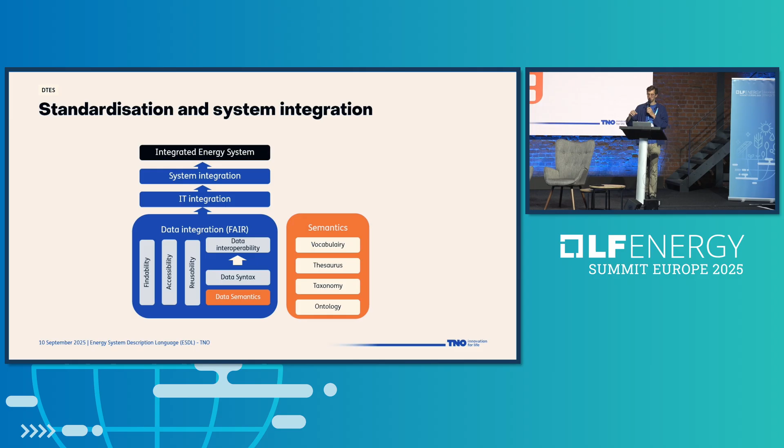So why did we start this? You say there's already twice CIM on the last slide. Why would you need ESDL? So we noticed that the interoperability between all these different models was very poor. And these models are not only modeling electricity systems, but also heat networks, gas networks, etc. The transparency on what kind of assumptions are below these models, what kind of data is used, and what kind of calculations are being done on them is very poor.

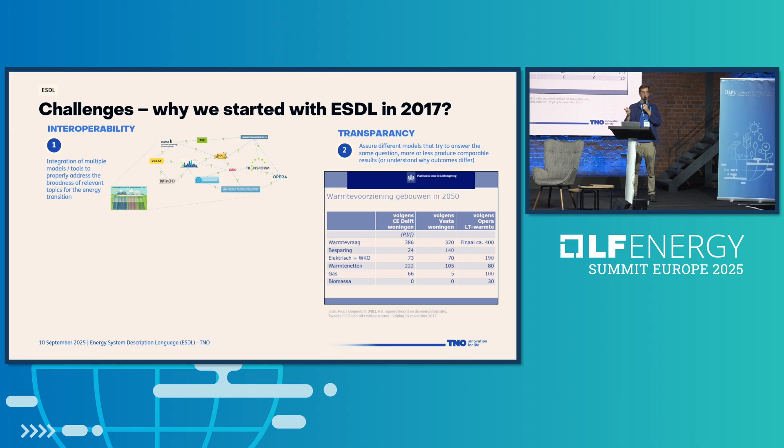So there was a study on 2050. Well, basically, the take-home message is three respected institutes were asked, like, how does the future look? And all three of them said something completely different, which is obviously fine. But at least it would be nice to track the assumptions they all made to see, like, hey, where did their visions diverge?

And then there's the challenge of aggregatability, which is already in a small country like the Netherlands, with the different DSOs, the different provinces, that they all do their study. And, you know, in the end, you want to have sort of one national plan and aggregate all these different studies, which is impossible. So what you'd need is an ontology, a data model that they would all use, with their own different type of models on top of them, to solve these three challenges.

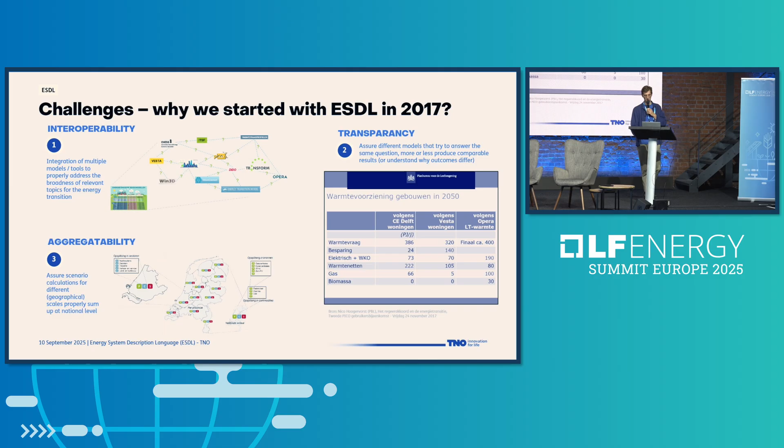So that's what TNO started off developing, and it started small, became a bit bigger. There are different levels of abstraction in this data model, from the level of an energy system down into energy assets. And it doesn't go as detailed as CIM does, but it does go down to the asset level. And it's quite vast. This is what it looks like currently.

And the things that are captured in this beautiful chaotic model are basically system components and topology for gas, electricity, and heat, and spatial information. You can add profiles to the different nodes, to different ports, obviously. And there is all different technology information, which more relates to the data source part. And then there's all these other things that you can add to it. But in the end, still, it was a very large hierarchical model that was built.

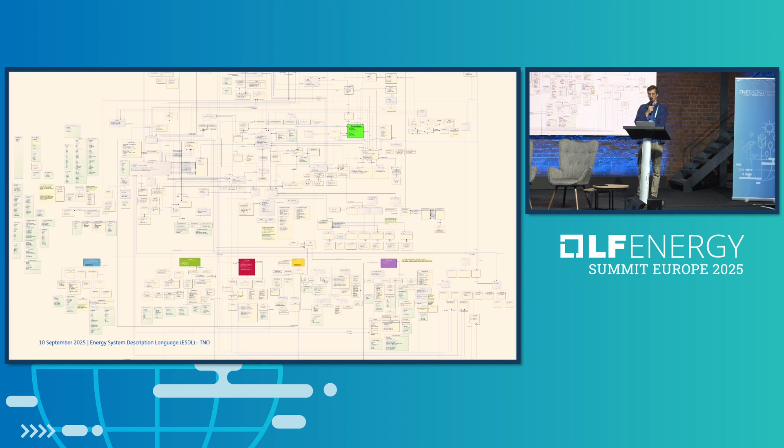And so, okay, you have your ESDL, you need your user interface. So it was only when a user interface was built, where you can draw your system on a map and an ESDL is directly created, that it started to get traction.

Other people in TNO started to actually use it. Say like, hey, this is quite easy to use. You could select your different assets you'd have. You could add your profiles. You could tap into profiles that were used in other projects. And it started to be very practical.

So, okay, we had the user interface. And over the years, this actually sort of exploded in our face. No, not really. I mean, there were all these different models and different research groups that started to build things on top of the map editor and integrate different models from, well, MESIDO for networks on the North Sea, to energy system simulators, to market models, to wind models, to district heating, network optimizations.

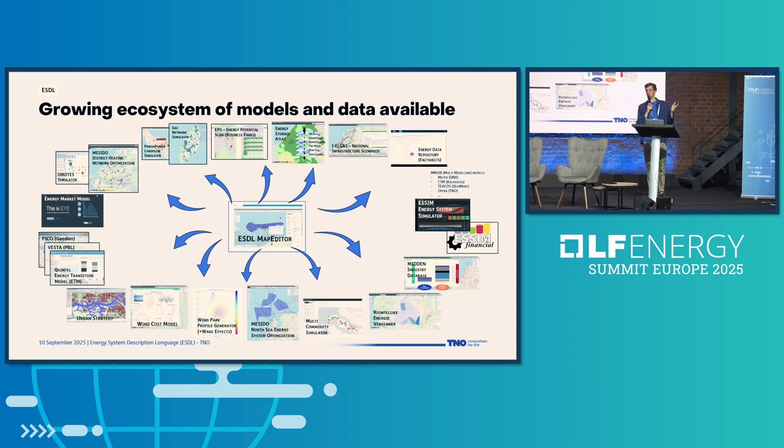So there were different parts, different labs at TNO that said, hey, this is actually very useful. I can draw now my energy system in a way, and I can communicate this to the people that work on the simulation models. So there were different application domains that started to use these different tools.

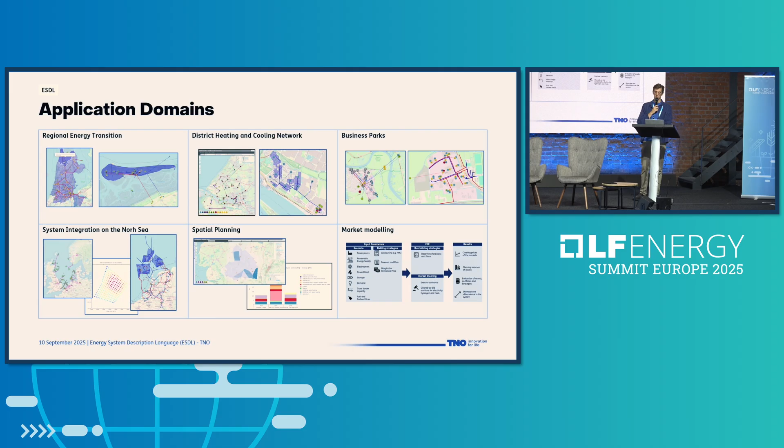And at the same time, we also started to create a data repository, like the energy data repository, where we store different profiles to use, standard profiles, both in consumption and production, which makes it really easy to start filling your ESDL model.

There's the Midden database that was created with all different types of industrial processes captured and translated into ESDL asset pictures and related information, so that you can easily tap into different industrial processes if you want to take them into account. So, okay, this is your data resources part.

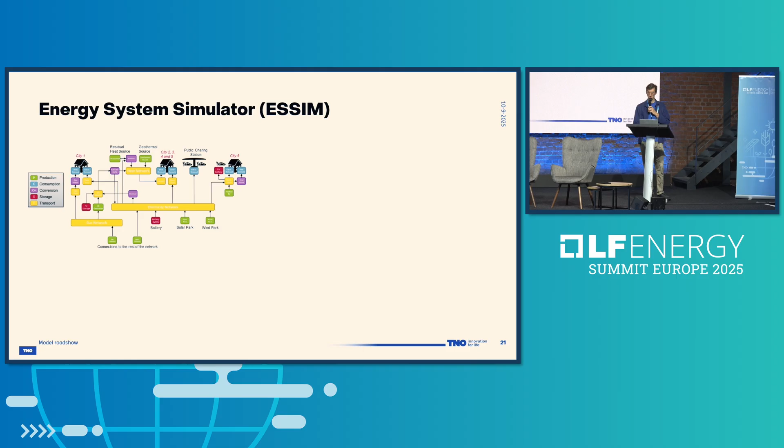Then there are different simulators actually used and developed by TNO. One of them is ESSIM. I won't go into it in a lot of detail, but it is interesting because this was something that was fully configurable in ESDL and was able to create different scenario simulations and answer questions that were quite relevant.

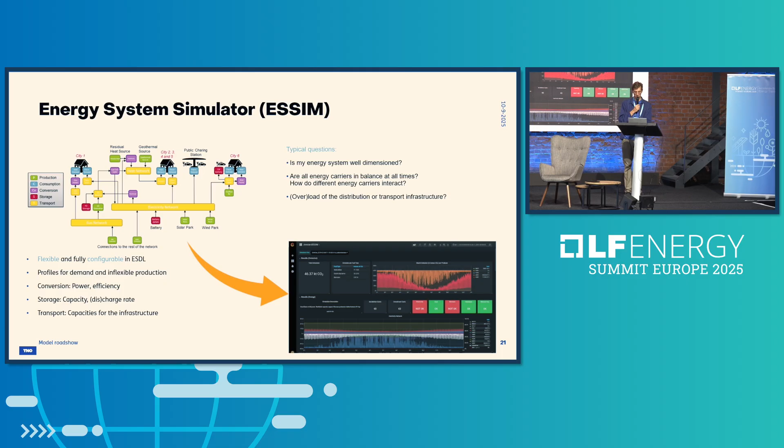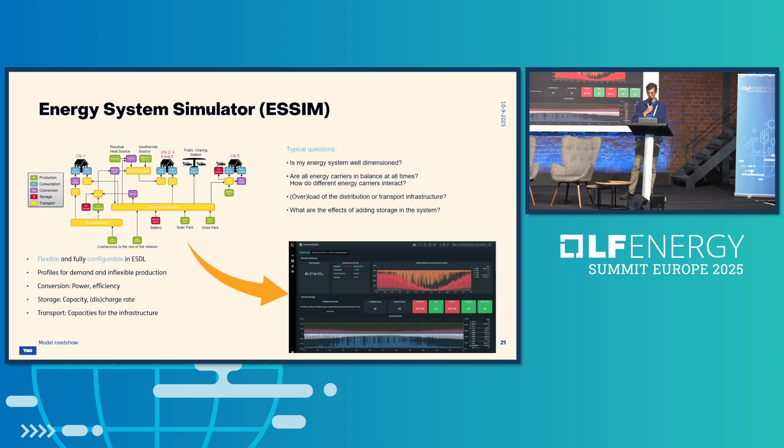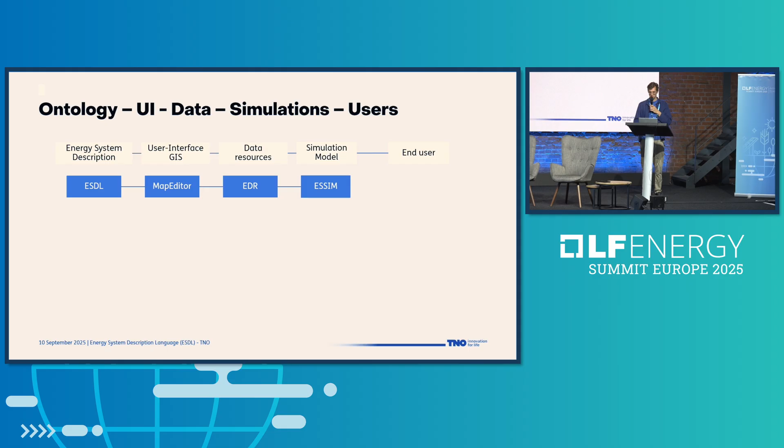So is it well dimensioned? Is everything in balance? Is there a particular area in the grid that will be a problem in future? What are the effects of adding this or that asset, etc.? So, okay, this is the energy system simulator that was used. Then you do need also an end user in the market to actually use this entire chain in order for it to become valuable.

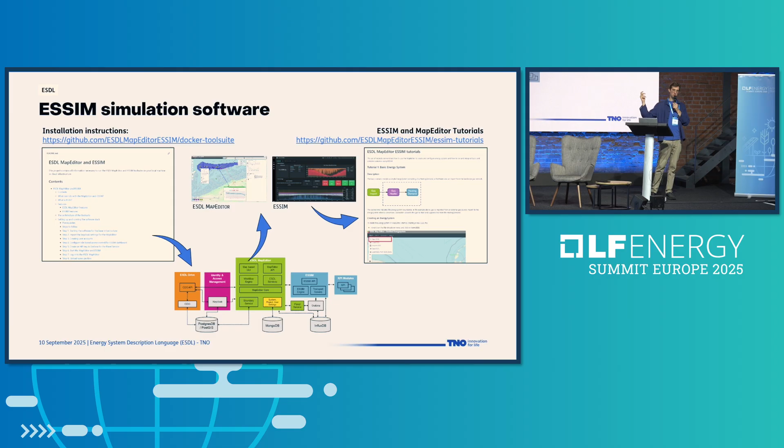So both ESDL and ESSIM are open source. There are quite a lot of tutorials out there. And the tutorials, they walk you through how it works, what's behind the curtains, something that I currently will not do.

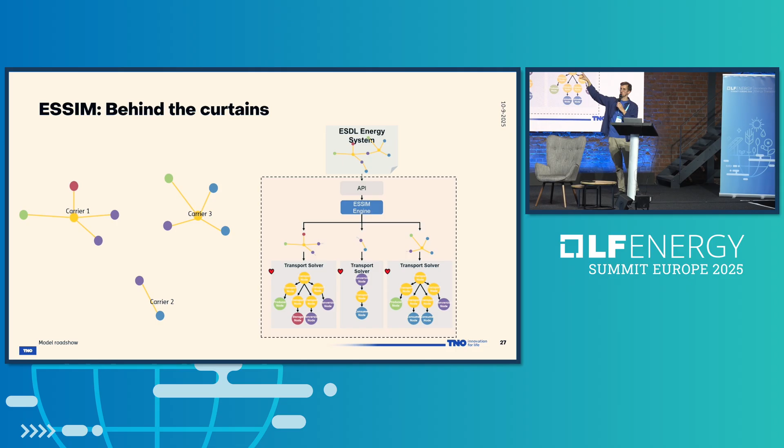What I will show is that some of the things that are happening at TNO is that once you do have your energy system and your ESSIM engine, you can then basically use different transport solvers for different types of carriers, whether it's a heat or an electricity or a gas network. And you can also easily replace your solvers with something else.

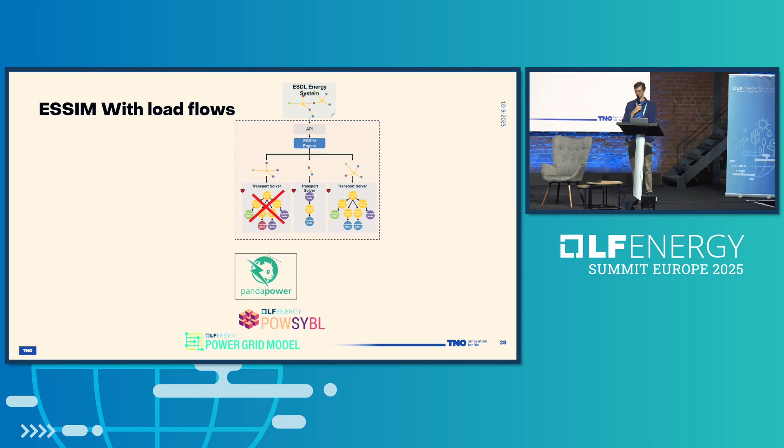Obviously, it can be Panda Power. We are currently working on PowSyBl. And after the last presentation, obviously, I cannot but only say that I hope that we will also integrate it with the power grid model.

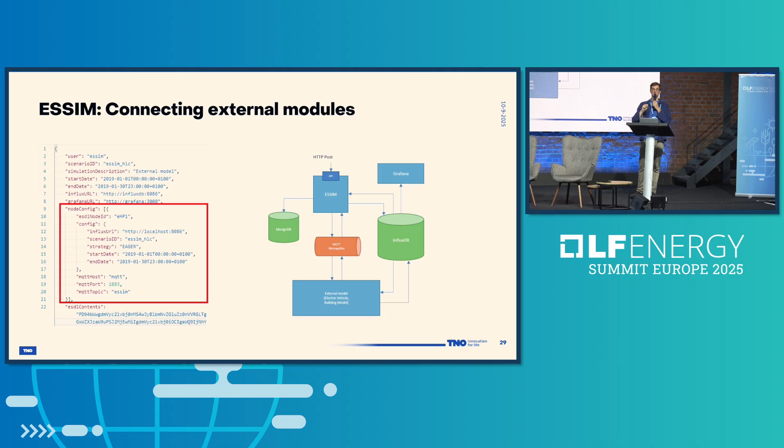Unfortunately, they don't all yet use it, but there are about 50, 60 in the Netherlands that have downloaded this software and started to use this in their daily work, which made us obviously very enthusiastic because we can then add the last important node to our chain.

So to come back to what I said earlier, the applied research organizations of this world that get state money, as TNO does, Fraunhofer also, I imagine. I think you could create something for industry, you could see if other industrial partners want it, and then it's time to find independent implementation partners to actually have it scale.

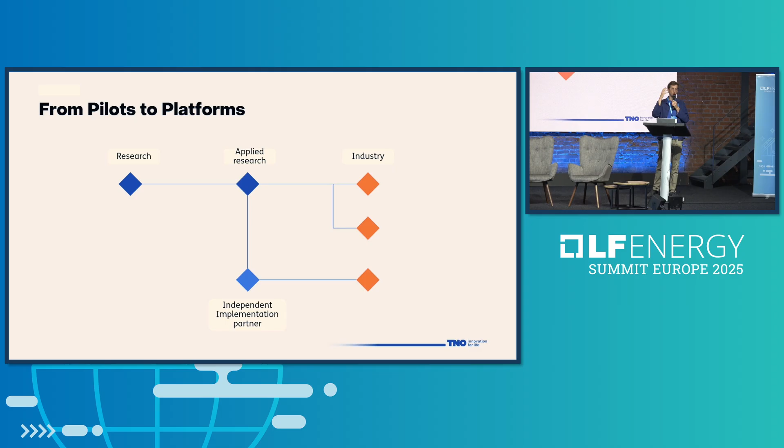There are, at the moment, sort of discussions with these implementation partners, and this is the search, sort of how to, what we now have. We have an end user that happily uses it, wants to pay for it, but I'm not sure how much, and then what for, and then would you start first to build a community and ask for a contribution fee? So these are questions that run through my mind. So if you say, hey, I have some of the answers in my mind, it would be nice if you share them with me afterwards.

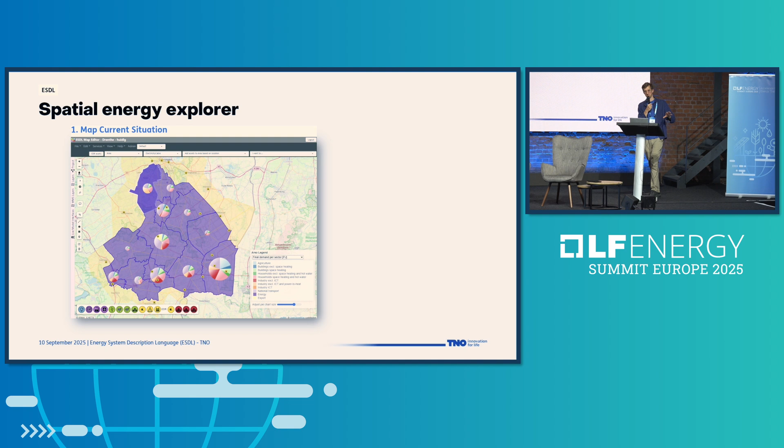There's a couple of other tools that I can show you, because you saw the exploded view of that interface and all the different models that were then able to be executed from this interface. One of them is the spatial energy explorer, which is one of the latest. But I think I won't do that. I will run through the slides, because I guess you get the message that all these different types of simulations suddenly become possible once you've created a common ontology to describe your energy system with.

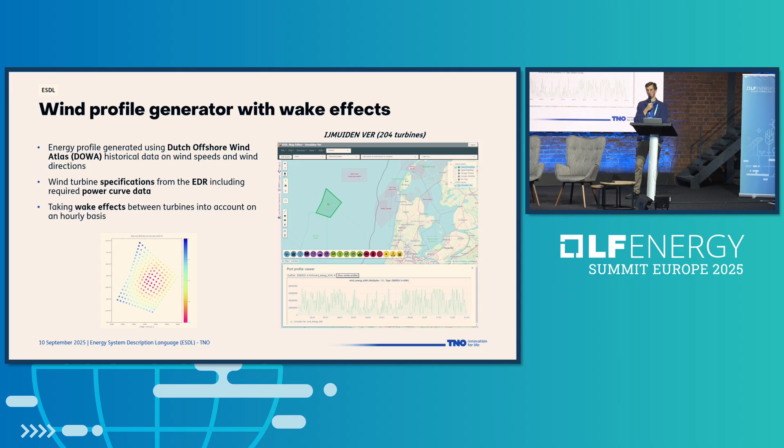An important development that we see, though, is that at the moment we built this user interface, the map editor, ourselves, which makes it easy because then you can integrate all these different tools and use it internally in projects to advise others. There was the people group in one of the companies, which is a commercial company with a lot of experience in geospatial platform building. But there's also ESRI that we currently have a conversation with to see whether they can include ESDL in ArcGIS, which would obviously be amazing.

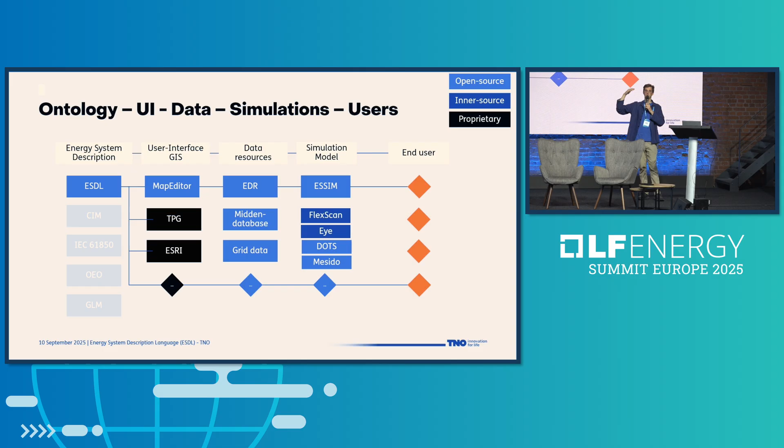It's also an important discussion that I already started today with some of you: you have all these different standards. Is ESDL the best one? I kind of don't care. I think what would be nice is if we converge towards something that works for everyone, and if that's with interfaces or adapters, fine. But I think it would be great to develop them in an open source manner so that we can quickly see whether it made sense. Once you have commercial platforms like ESRI join the journey, that'd be extremely exciting for us, because then all the different models are accessible for millions of people.

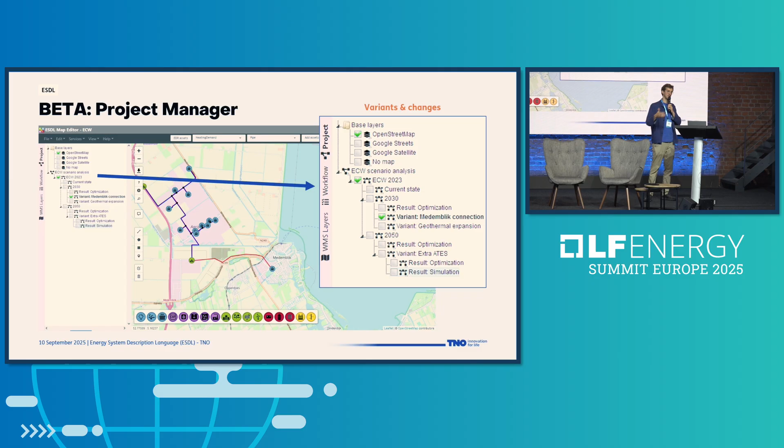We've documented it fairly well, maybe a bit too well, because TNO as an organization does projects, and the risk is that it sometimes becomes a bit patchwork-like. Maybe sounds familiar. Then there are project managers to help solve the complexity that you've just created. But in the end, to come back to the question asked at the start of the day, less talk, more code, or more yoga. Maybe, but I also see that at the moment there's a need to form a community and structure this code and these data models, and structure the strategy that all these initiatives take in order to align the data, the models, and the ontology that they use.

So what I'm thinking of is having an ESDL open source core as an open standard, which would be a bit better than CIM, because you could obviously develop it quicker, and then have a strategy where you develop your tools first internally with companies and then bring them to the outside world. Next steps, I think I've mentioned them all during this presentation. I hope that we can jump on this train, moving towards graduation at some point.

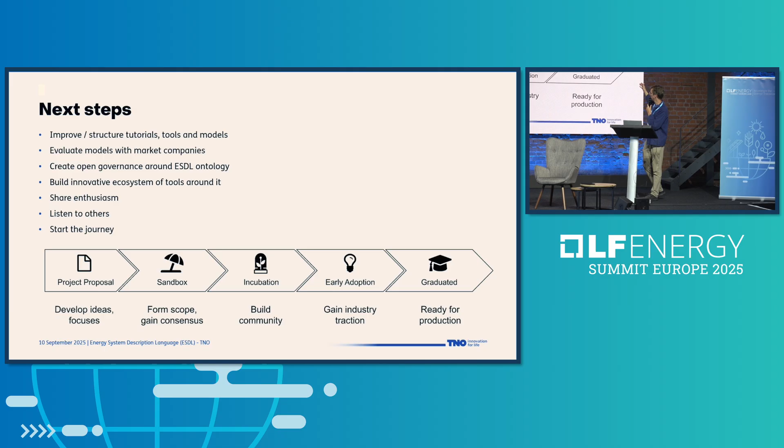Some of the questions on my lips at the moment: do we join the Linux Foundation Energy? And is it with ESDL as a data model or ontology, or with some of the open source models that we've built around it? Not sure. I'm not sure what the time is. Oh yeah, 10 minutes left. I think 10 minutes is nice for questions.

And obviously I'm aware that people think, hey, wouldn't it be amazing if we develop a new universal standard? Yes, that would be amazing. Tomorrow there's a meetup at 11 where we meet with people working on different types of models using different ontologies. So if you work on a model, have an opinion on the underlying data models, and want to add yours to the list, please join tomorrow. You can already fill in your ontology in the details of the event. We create a table, and every model prepares a short pitch: this is the type of solver we use, this is the optimization, this is the underlying ontology. Then we see where these adapters should emerge, where we should converge or maybe diverge.